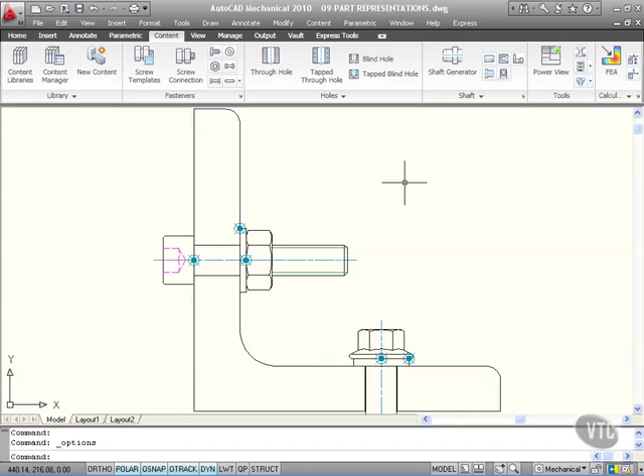When you're working in AutoCAD Mechanical, there are three standard part representations. They are symbolic, simplified, and standard. Now, at the moment, we're using the standard representation. So these nuts and bolts here and everything are using the standard representation.

You can change the default setting for that, i.e. what represents what part. So if I right-click and go to Options, and then go along here using the arrows and go to AM Content, you can see there the default representation for standard content is standard. So for all standard parts and content from the content libraries, you get a standard representation. I always leave that as standard. So I'll OK that and leave that as it is.

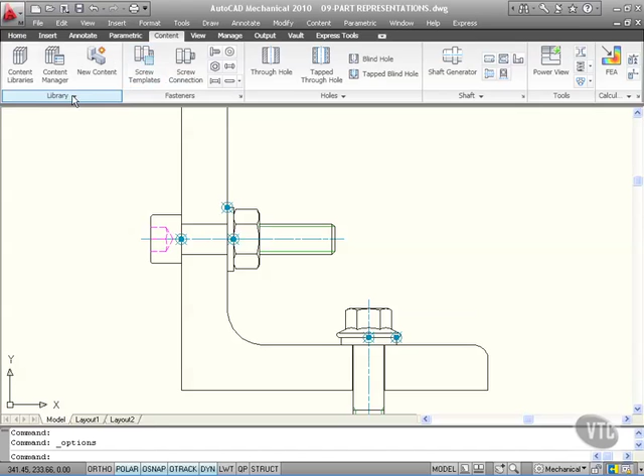Now, let's have a look now at some representation of these parts in our drawing. You can change the representation here in the Content tab in the Library panel. I'm going to click on the flyout there and just pin that open so that the Change Representation icon is available. Now, if I change representation here, click on it, come into the drawing, I can change the representation of any of these parts. So if I select my L bracket here and then right-click to confirm, I can change the representation, the 2D representation.

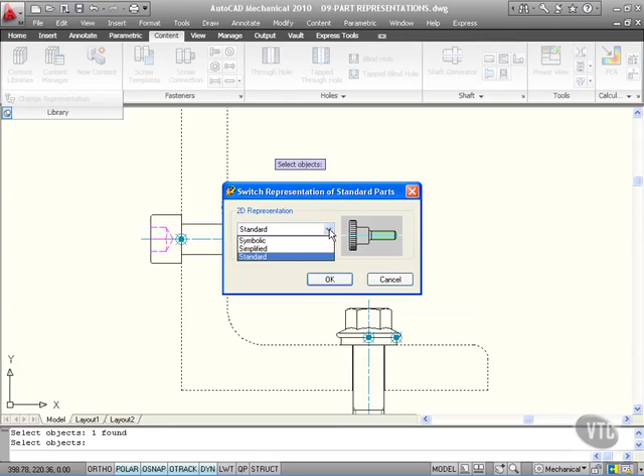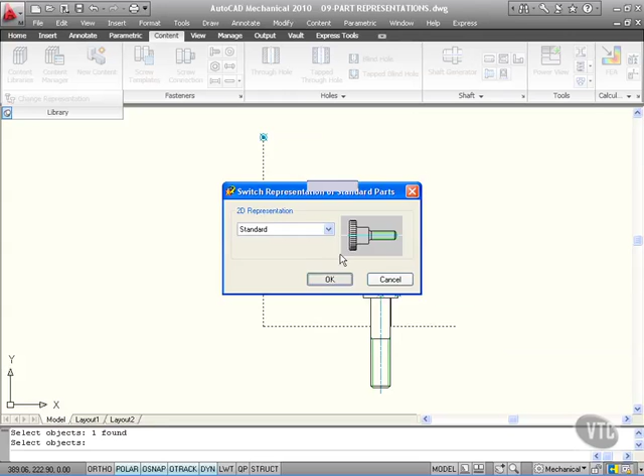If I change that to, say, simplified, and OK it, look what happens. Very, very different to a standard representation. It's just showing a very simplified L bracket, just showing the line like that. If I change that back now and click on the line here and right-click and go back to standard, you'll see the difference. Very, very different looking though, aren't they? So be careful when you're changing representation. Be aware of what your client or your customer needs.

So if I change the representation, say, of a bolt now, if I click on this one here, and I right-click there once I've selected it, and I go for symbolic, watch what happens. Not much left, just a center line showing where it goes through the plate. Now, if I change that back to, let's say, a simplified one, what happens there? Let's change that to simplified. Looks similar, as you can see, but it doesn't actually show any of the hidden detail.

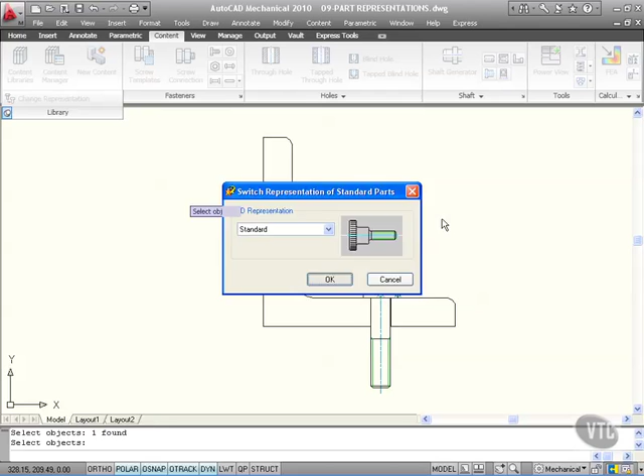If I change that back to standard now, and select it here, and then right-click and go back to the standard, the default, notice the detail on the preview, notice the detail on the bolt as well. So that's what part representations are all about. What they allow you to do is show an object in a particular manner, whether that be symbolic, simplified, or standard. Most of the time you will use standard like this for detailed drawing, but there will be occasions, manufacturing drawings and so on, where you only need to use the symbolic settings because the fitter or the manufacturer knows exactly what you're talking about anyway.

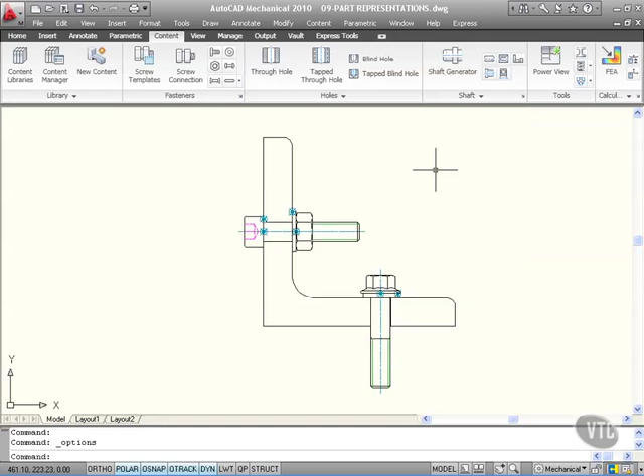So that's part representations. They are here on the Library panel, on the Content tab on the ribbon. So it's Library, click on the flyout, there's Change Representation there. And also, if you need to change it by default, right-click, Options, go to your AM Content tab, and it's down at the bottom here, Default Representation for Standard Content. So, use your part representations for detail work or less detailed work when you're basically showing a conceptual design or perhaps generating a manufacturing drawing.